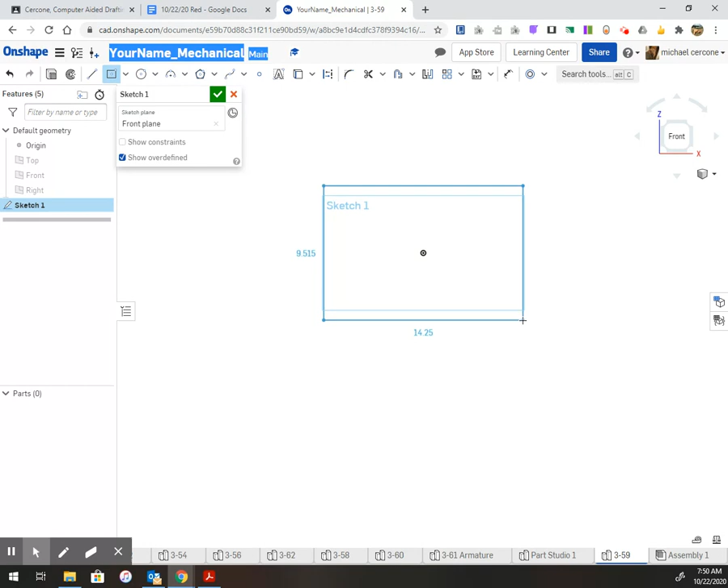I'm drawing 359. You guys all have access to the PDF. I'm choosing to go about this using a center point rectangle, and everything could be drawn in one sketch. I'm going to do this in multiple.

So that center rectangle, the left to right is 4 1/4, so 4.25, and then the height is 2 7/8, so 2 plus 7 divided by 8, or type in 2.875. And now this would have fillets.

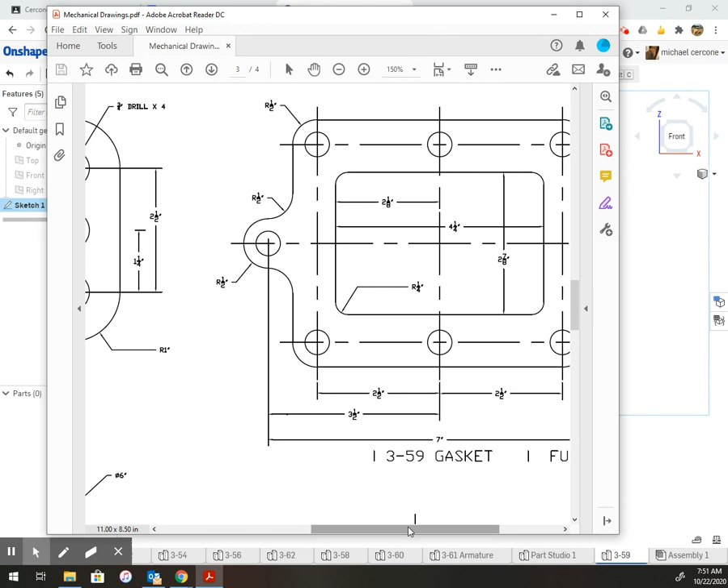I'll apply them in a minute. And then there's another larger rectangle. This one, you're not provided with that left to right measurement, so you do in fact have to figure it out. So I'm going to take these two measurements, these 2.5, 2.5, add them up to 5, and then figure out what my radius of this fillet is, which is 1/2. So I'm adding in 1/2 on this side and 1/2 on this side. So it's a total of 6 for that rectangle.

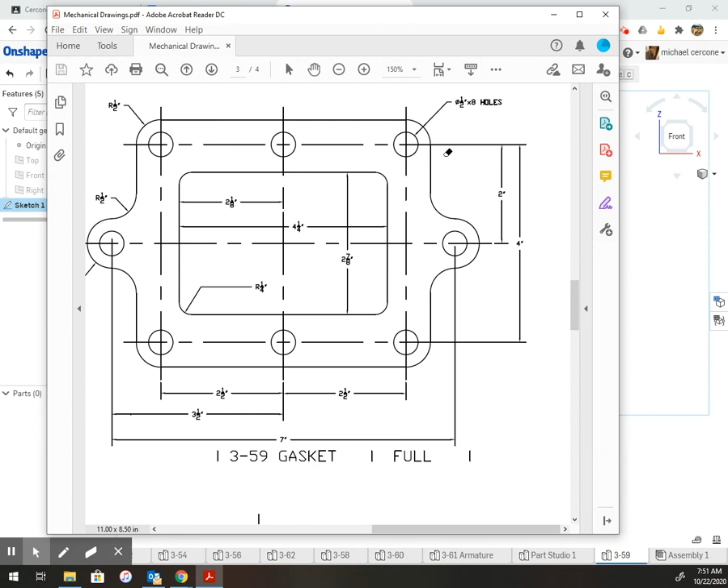And then the height of it is 4 plus the radius plus the radius. So it's 6 by 5. So I drew this one, and I'm going to type in 6 and 5.

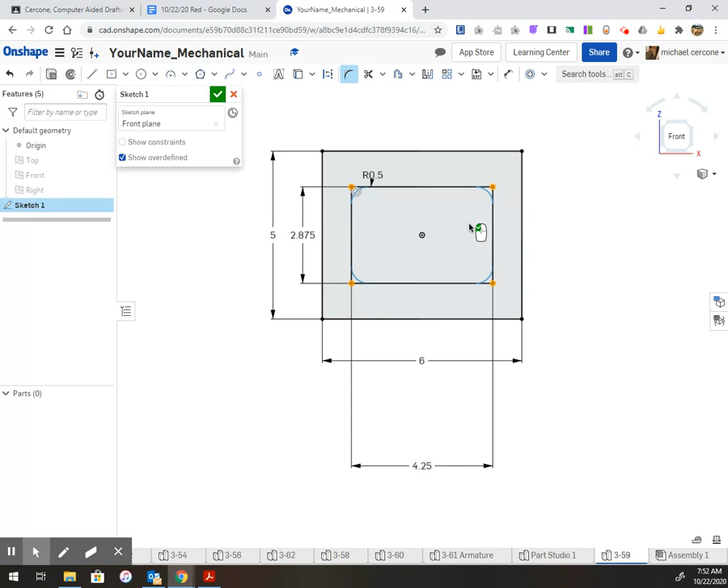I could apply the fillets in 2D or 3D just to show you guys the two different techniques. I will actually do both 2D and 3D. So these ones, I'm going to select all of them, and then left click. Now I could type in my dimension, which is a dimension of 1/4 of an inch on the inside. So 1 divided by 4, or 0.25.

Like I said, I'm going to do 3D fillet next. So now I'll extrude. No thickness is provided, so I'm just going to go with 1 inch. My fillets on the outside, I could use this fillet tool. I could also do the interior ones as fillet.

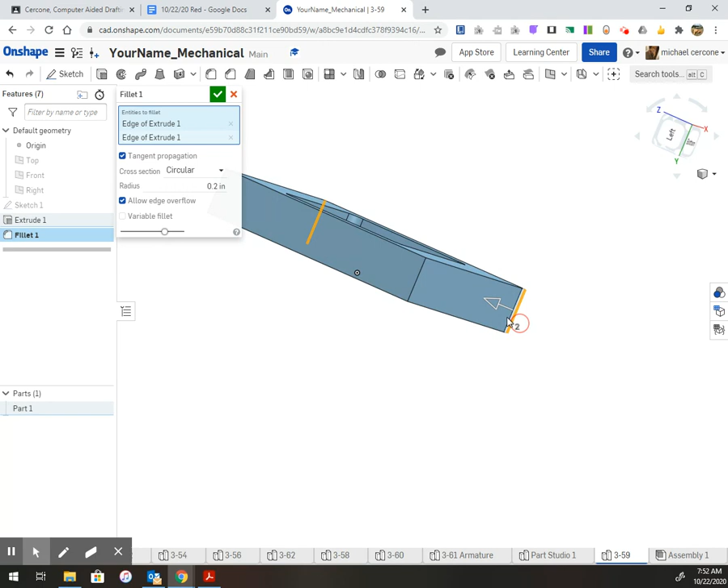So I'm going to select all 4, and type in my radius of 1/2 of an inch. If you select the wrong ones, just delete what you don't need.

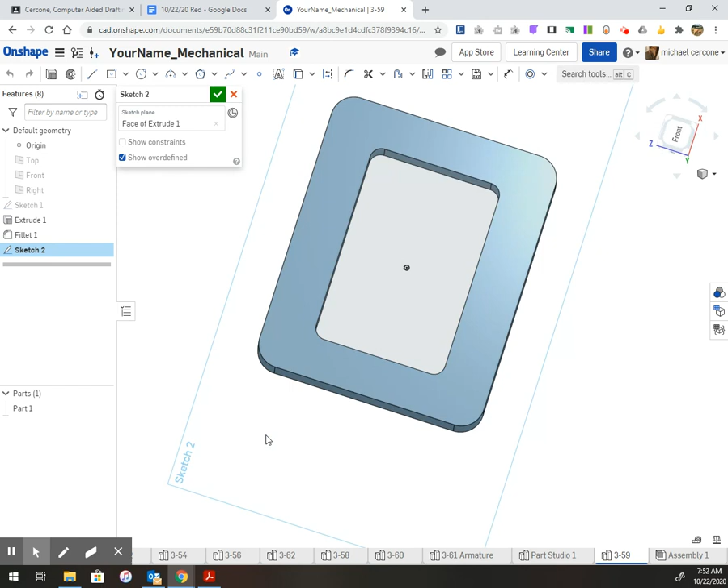All right, so now I'm going to build on right off the top. So right click, view normal to sketch plane. If you have to rotate, just rotate it around.

Starting with a construction line, snapping to the midpoints. This will help me create those constraints that I need. And I'm going to draw now a circle, making sure to snap to that horizontal. I have the same thing on the opposite side.

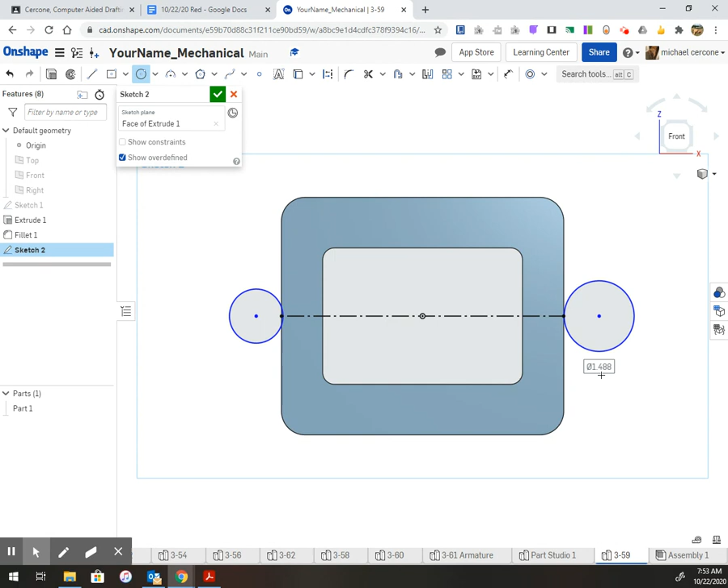I probably could have used the slot tool as well, but that would require more trimming. So I'll dimension one of these after the fact. What I want to do now is just draw a line from the top quadrant over. And then I need to do the same thing for the bottom, but you need to include a line

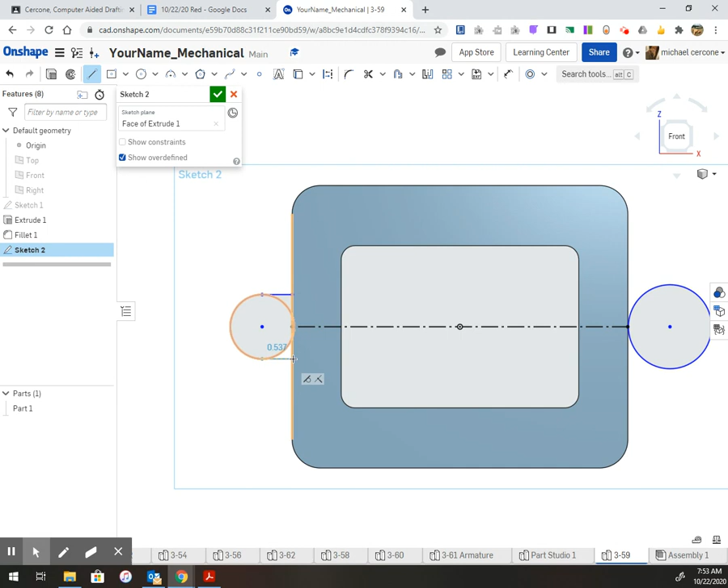connecting these two horizontals together. Otherwise, you won't have that profile. So I'm drawing my line here, and now I can trim. I don't need these parts of the arcs.

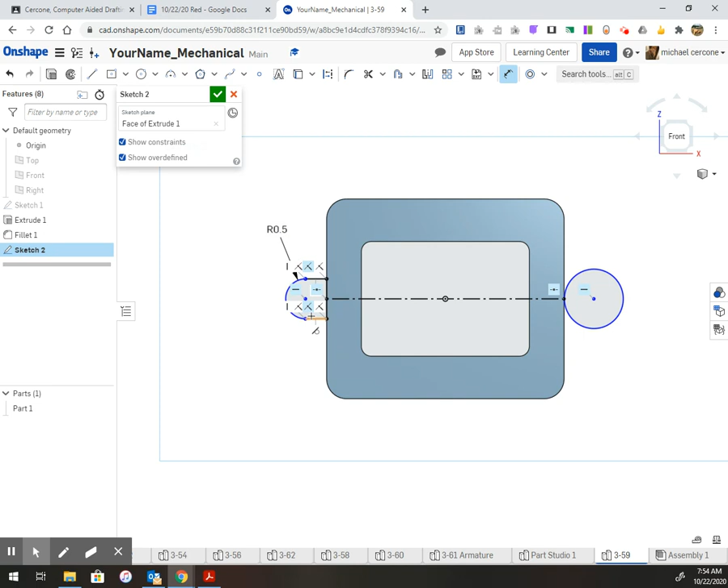If you turn on Show Constraints, all of this should be visible, and now we need some dimensions. I typed D to bring up the dimension tool here. This is 0.5. This line right here, 0.5. Circle in the center, 0.5.

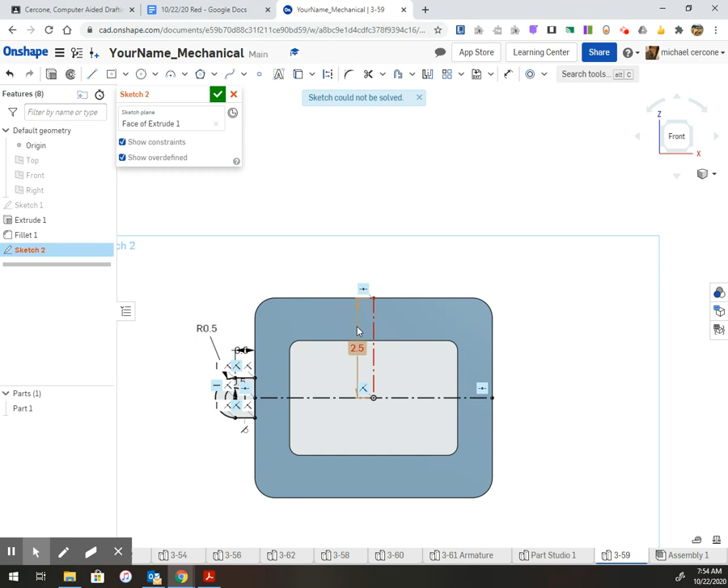I could do the same thing on this side, or I can mirror it. I'm choosing to mirror, so I'm creating a vertical construction line. It goes red because I didn't need a dimension on it. It was just over defining.

Now I'm using mirror. Now keep in mind, you could do this in 3D as well, or as a feature. So you select your mirror line, select your entities. There we go. So now I'm choosing extrude. So I want to select both contours.

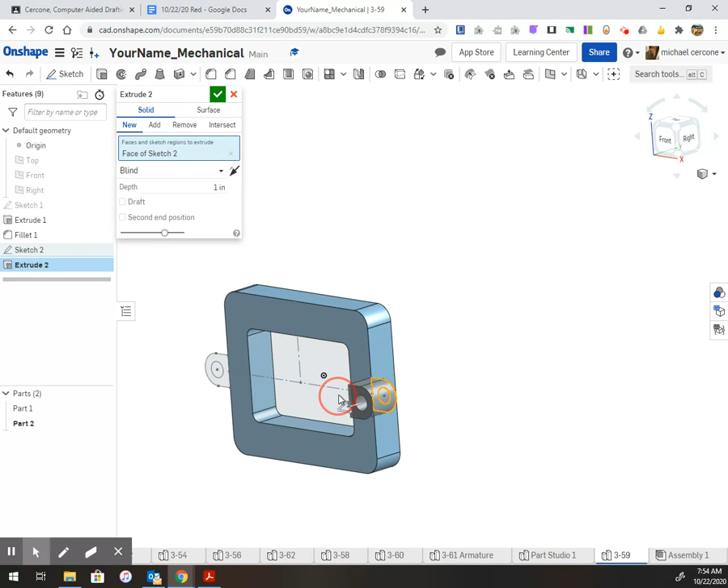This one's new because it's going in the opposite direction, so I'm going to rotate it. It's still saying new. I need to choose add, or I'm going to end up creating multiple parts down here. Add, now it's still one part.

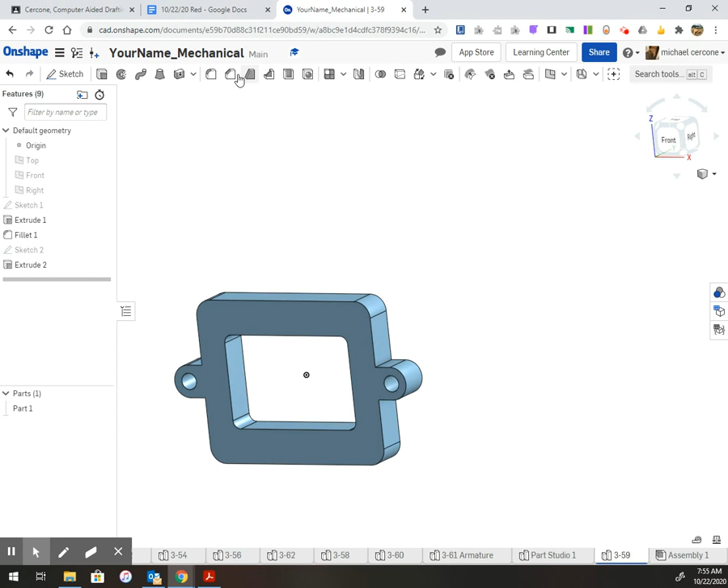The 3D fillet would work now. So I'm choosing fillet and selecting all of these edges and typing in 1/2. I'm going to press Shift 7 to go normal to. And the last thing I need to do now is add these 4 holes.

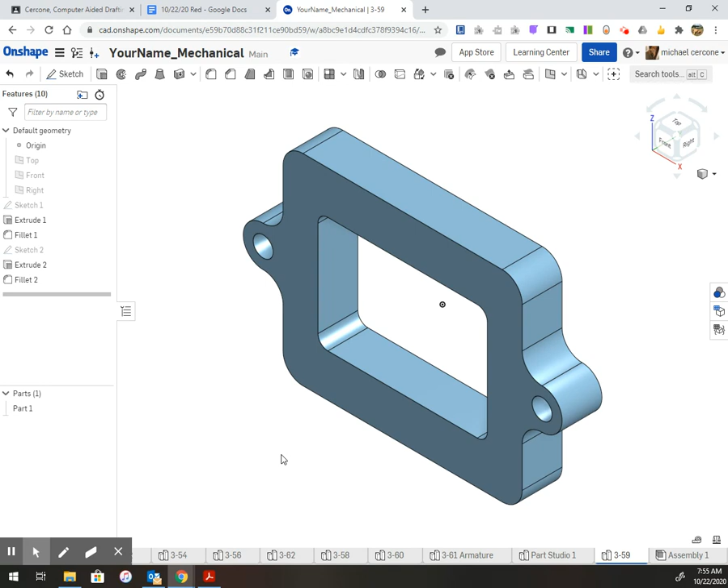I should be able to do all of this with just using constraints and 1 dimension. So I'm going to start a sketch here. I'm going to go normal to, select the circle tool and hover over this arc to get the wake up center mark and create that concentric.

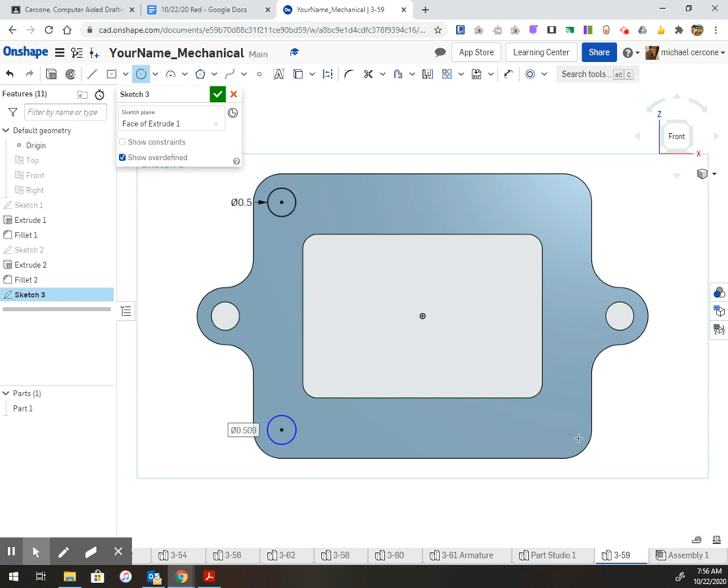I'm going to type in 0.5. I'm doing this 1 time. The rest I'm just going to draw because I'll apply a constraint to them. So you have to hover over that edge.

And now I need one that goes here and horizontal with the other. I do the same thing with this one. I'm using those wake up center marks.

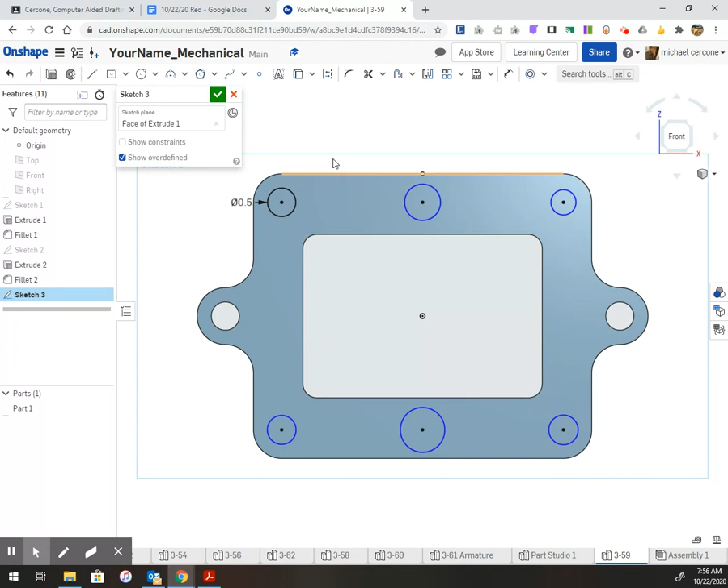All right, everything needs a dimension. So what I'm going to do is, this is the only geometry I have. I could select all of these at once, go up to the top where my constraints are and add an equal constraint. And it'll make all of those equal to my 1 dimension.

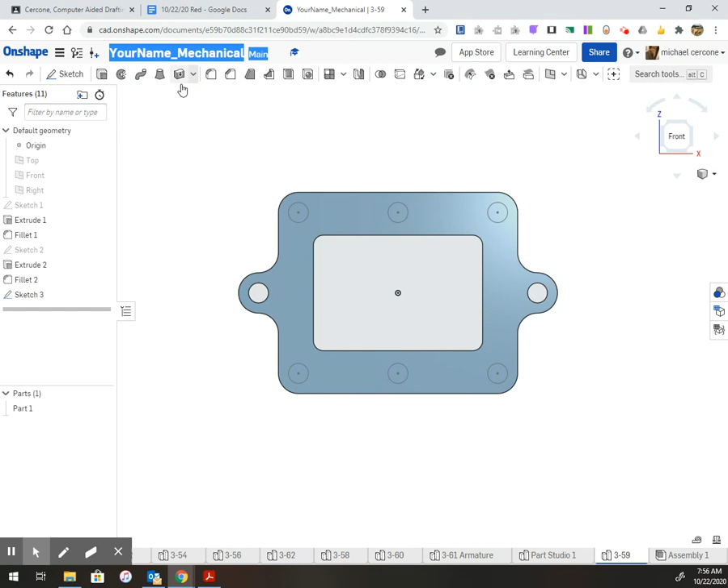Saves me the time of not having to type 0.5 over and over. Now I extrude, remove, and I need to make sure to select each one if it doesn't pre-select all of them.

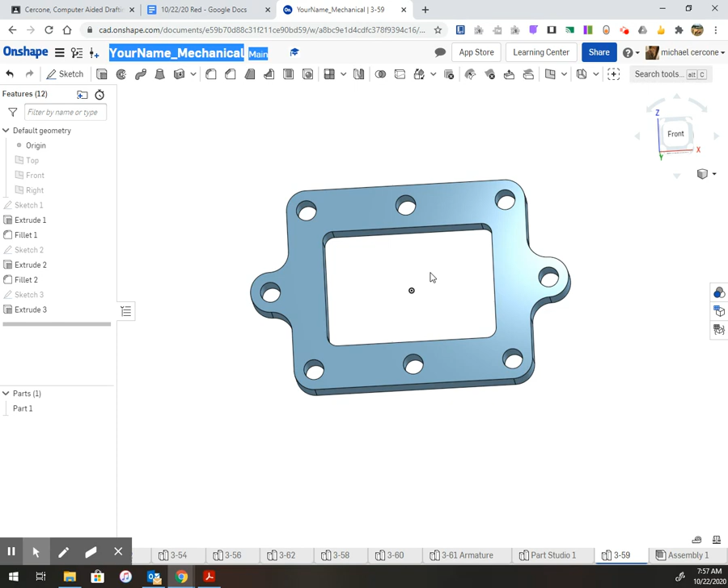So what I've been having you guys do with your sketches, you could do multiple sketches. You could draw all of this in 1 sketch and do it that way if you wanted, but this allows you to do 1 step at a time. We're just going through this additive process, a little bit at a time.